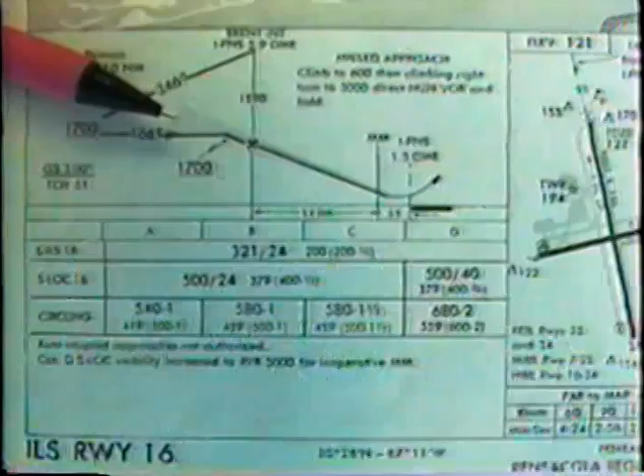There are 2 broad categories of instrument approaches: precision and non-precision. The difference, while very important, is only in the conduct of the final approach to the airport, where a precision approach provides electronic descent guidance and a non-precision approach does not.

Up to the final approach fix, the following discussions of segments, fixes, altitudes, and procedure turns apply equally to precision and non-precision approaches.

Cleared for approach. This clearance authorizes you to fly the procedure on the approach plate and to descend to the published altitudes. You may not descend during an approach until you have received approach clearance and are on a published route. The published route may be any approach segment, transition, or airway. If an airway, you may descend to the MEA, but be sure it is higher than the transition or initial approach altitude. Otherwise, you will find yourself climbing later on.

When flying direct to an approach fix, you may not descend even if cleared for approach until you are on a published route.

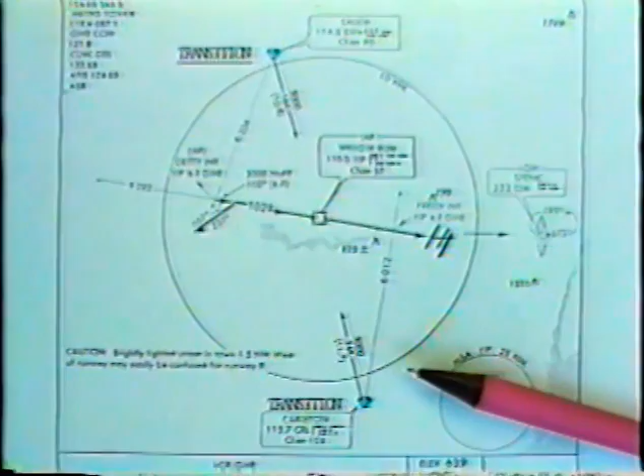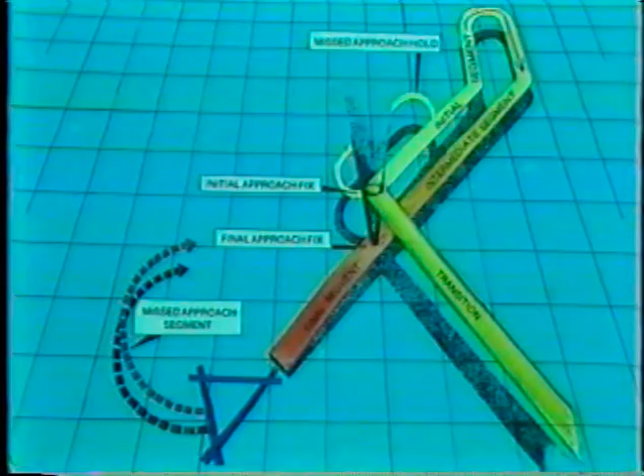This diagram shows the segments of a typical approach. The names and arrangements of the segments do not depend on the type of approach we assume it to be. An approach may have as many as 4 segments and 1 or more published transitions from the en route environment. Each segment and transition has a clearly defined course, a beginning and an end, and a published minimum altitude. The pilot has certain tasks to accomplish during each segment of the approach, and understanding the various segments of a particular approach is important in planning how the approach is to be flown.

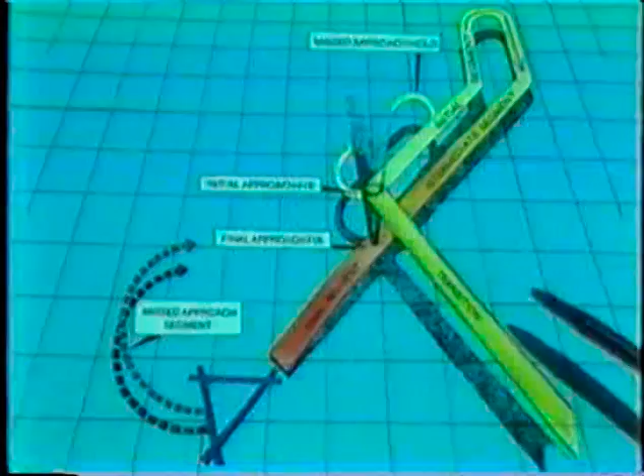Transition, the general term that describes the change from one phase of flight or flight condition to another. In other words, transition from en route flight to the approach, or transition from instrument flight to visual flight.

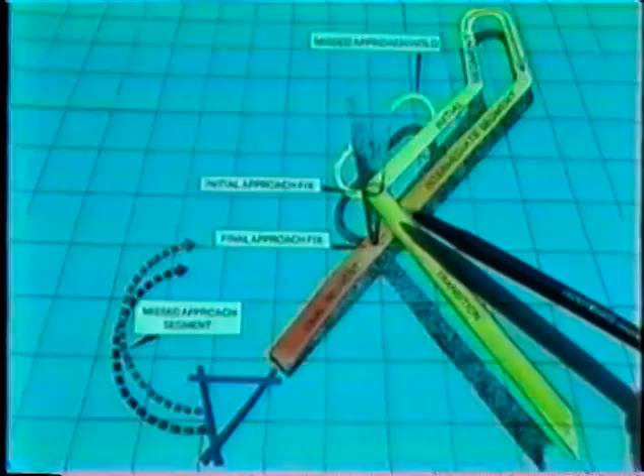Initial approach, the segment between the initial approach fix and the intermediate fix, or the point where the aircraft is established on the intermediate course or final course.

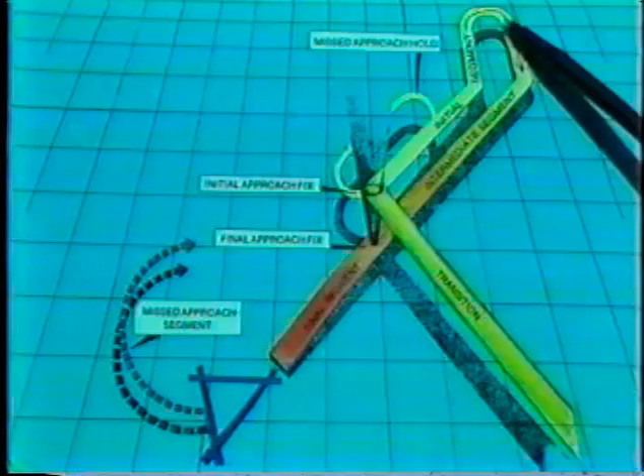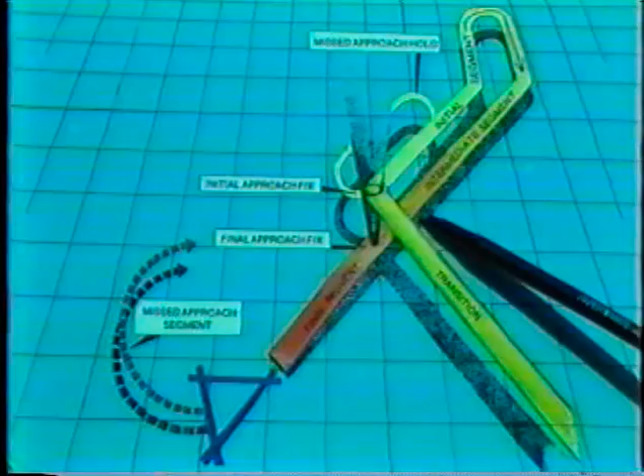Intermediate approach, the segment between the intermediate fix or point and the final approach fix. Final approach, the segment between the final approach fix or point, glide slope intercept for precision approaches, and the runway, airport, or missed approach point.

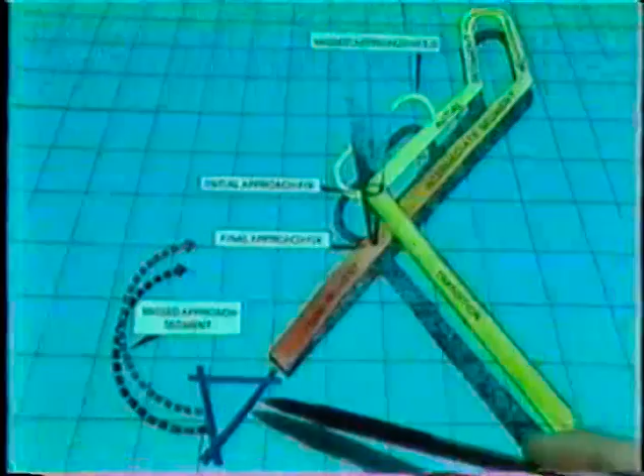Missed approach, the segment between the missed approach point or point of arrival at decision height and the missed approach fix at the prescribed altitude.

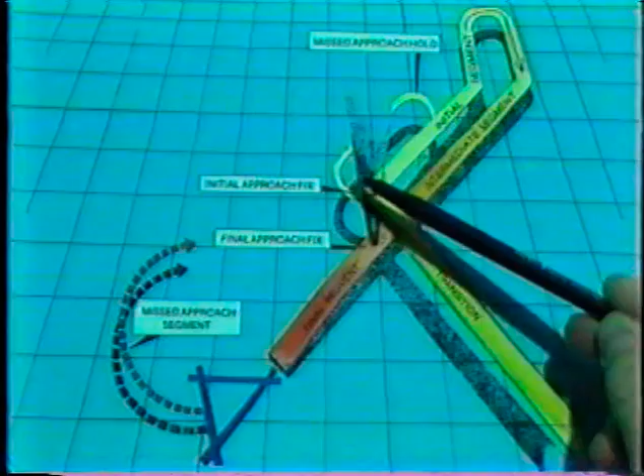This plan view shows a transition from one en route fix to the Pickens NDB. Transitions are also called feeder routes. Assuming the pilot has received approach clearance, the pilot may descend to the altitude published on the plan view for the transition he is on.

The initial approach fix, marked IAF on the plan view, is the Pickens NDB and is the point where the approach begins. The initial segment begins at the IAF and is the procedure turn outbound segment of the approach. It includes the entire procedure turn and ends when the aircraft is established inbound to the fix. During this segment, the pilot should slow the airplane to approach speed and descend to the published altitude of 1,500 feet.

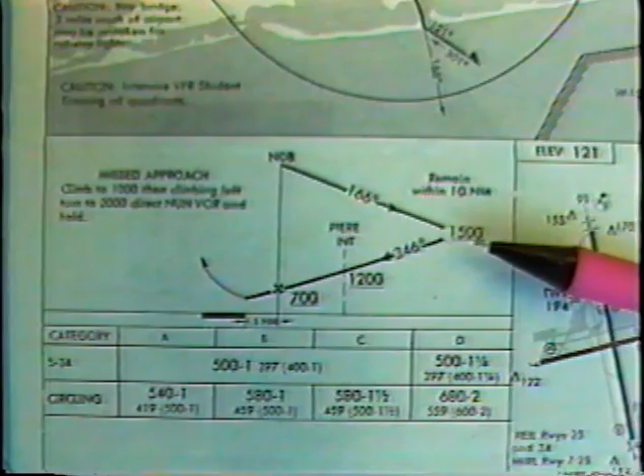This particular approach has an intermediate fix, Pierre intersection. The intermediate segment begins at Pierre intersection when the aircraft has turned inbound on the 346-degree bearing and ends at the NDB.

Minimum sector altitudes, MSA, are not to be used during an approach. They are for emergencies only. Here, we see a 25 nautical mile circle at the top right corner of the approach plate. The notation MSA, PKZ, NDB indicates the center of the circle.

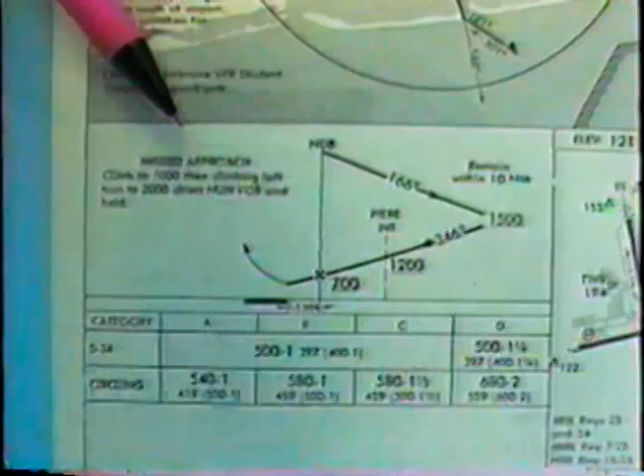It is during the procedure turn inbound segment of the approach that it's a busy time for the pilot. Here, the final landing checklist should be completed and the missed approach instructions memorized. Since the altitude specified for this segment is lower than that for the initial segment, the pilot should descend to 1,200 feet.

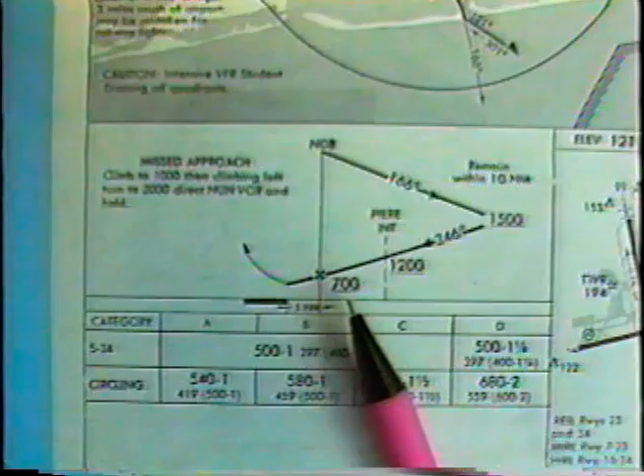The final approach fix, FAF, is the Pickens NDB and is identified by the Maltese cross on the profile view. It marks the beginning of the final letdown to the airport. When not in radar contact, the final approach fix inbound must be reported to ATC. On this approach, the final approach fix is the NDB, and the intermediate fix is located at Pierre intersection.

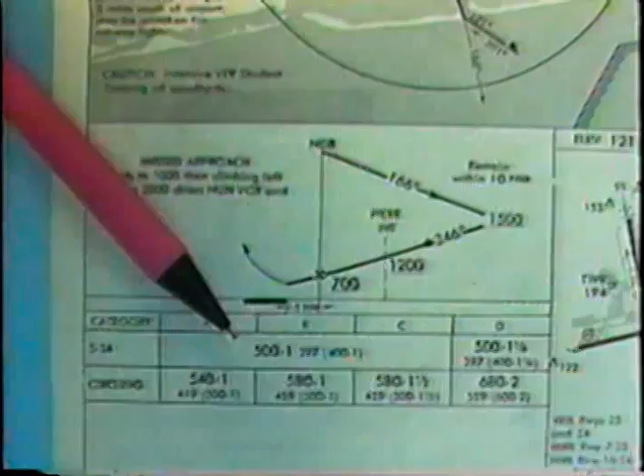The final approach segment is the course from the final approach fix to the missed approach point. During this segment, the final descent to minimums is made. Since this is a non-precision approach, in other words, there is no descent guidance, the pilot simply descends to the minimum descent altitude, MDA, of 500 feet, and levels off, carefully tracking the 346-degree bearing from the NDB until the missed approach point, MAP, is reached.

On this approach, the missed approach point is 1.5 miles from the NDB, and it is usually identified by timing the final approach segment.

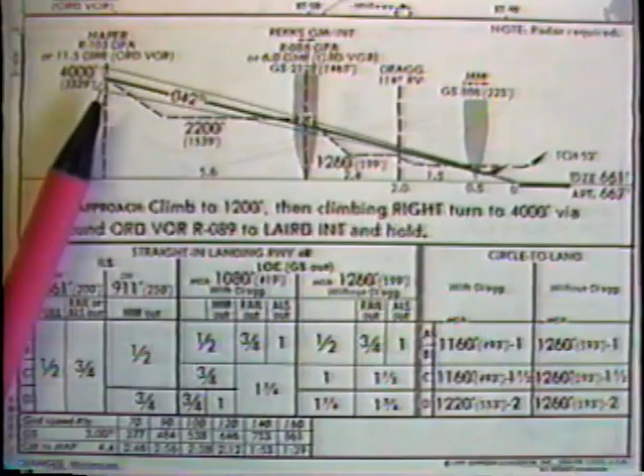In some cases, the final approach segment is divided into parts with different altitudes separated by step-down fixes. A step-down fix may be defined by a crossing radial, a DME fix, or a fan marker.

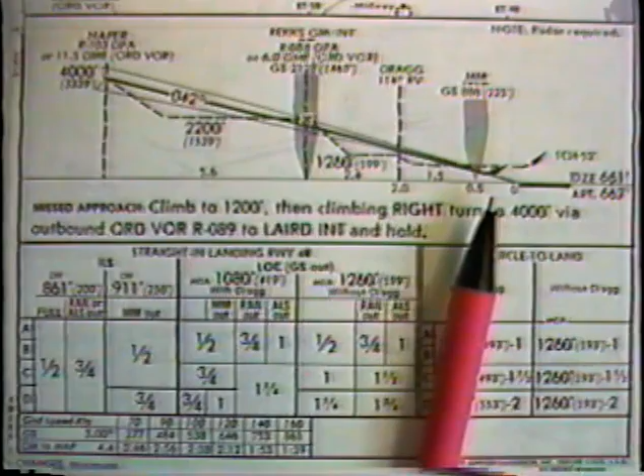Assuming the runway is not seen, the missed approach segment begins at the missed approach point. It is crucial to immediately initiate a safe climb away from the terrain. The pilot should not have to refer to the approach plate for missed approach instructions now, but should have memorized

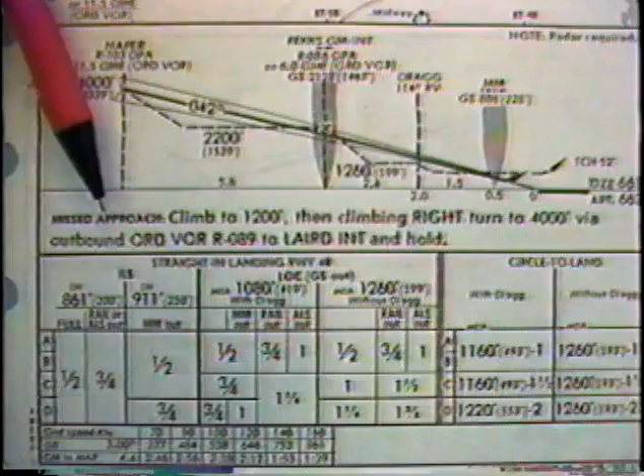them before beginning the final approach. While a missed approach requires an ATC report, the first priority is to climb away from the ground and begin the missed approach procedure. The radio call can safely wait a moment or two.

The missed approach segment for ILS runway 4 right at Chicago O'Hare consists of climbing straight ahead to 1,200 feet, then making a climbing right turn to 4,000 feet via outbound VOR radial 089 degrees to Laird intersection and hold.

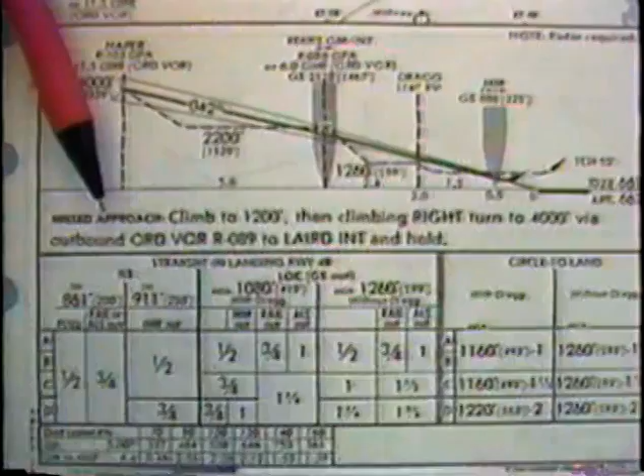The hold at Laird intersection is the published hold. This is shown in the plan view and missed approach section of the approach plate.

If the runway is seen, a landing can be made. A straight-in landing is a landing on the runway referred to in the approach name. Landing on other than runway 4 right constitutes a circle to land maneuver and requires the use of circling minimums, even if no actual circling is done to line up with the desired runway.

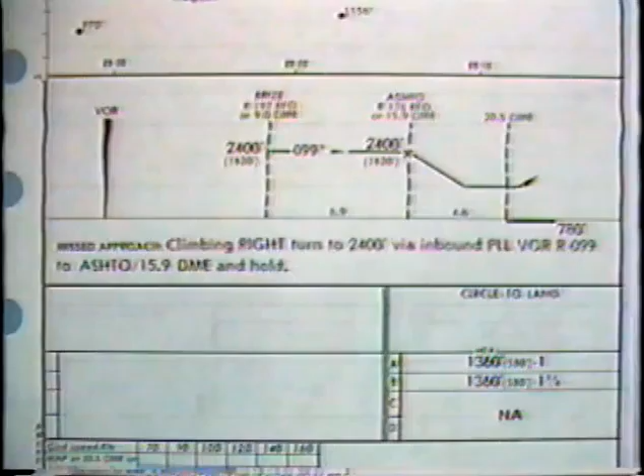If an approach name does not specify any runway, as in the Rochelle, Illinois VOR-A approach, no straight-in minimums are shown.

At a field with no control zone, circling presents an additional problem. Below 700 feet AGL, you are in uncontrolled airspace where VFR minimums are 1 mile and clear of clouds. There just might be somebody in the pattern practicing touch and goes, and you are both legal. Broadcasting your position and intentions on Unicom is your only defense against this danger.

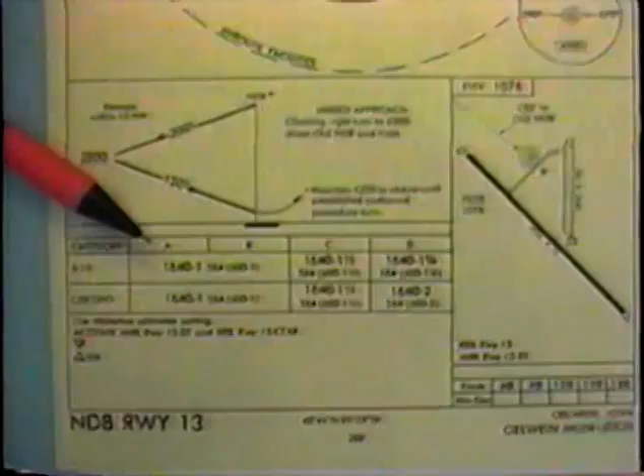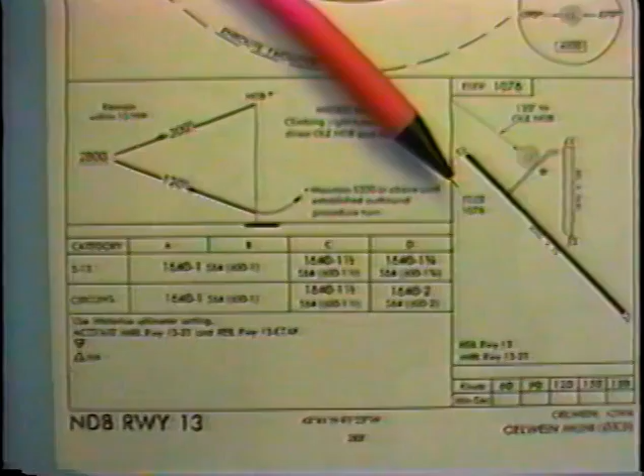The large numbers in the minimums box give minimum descent altitudes, MDA, above sea level, MSL. In the straight-in landing section, the parenthetical number is the height above touchdown, or HAT. Adding this number to the touchdown zone elevation, TDZE, shown in the profile, gives the MDA. 564 plus 1076 equals 1640.

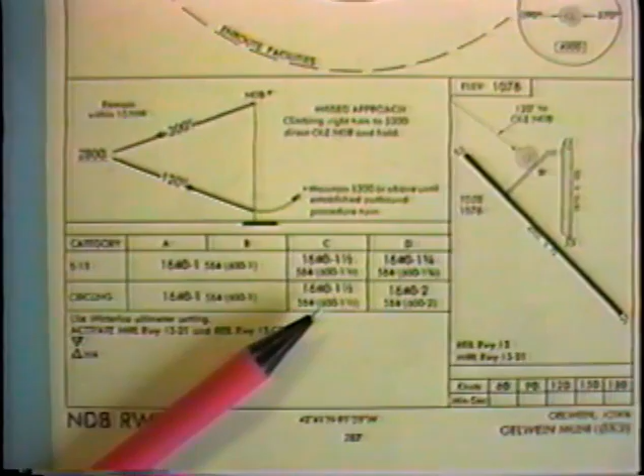The touchdown zone elevation is the highest point in the first 3,000 feet of the runway. The parenthetical numbers in the circle to land section are height above airport, HAA. This, plus the airport elevation, the highest point on any runway, also equals the MDA. 564 plus 1076 equals 1640. The highest obstruction on a Jeppesen plate is shown by the curving black arrow.

An approach may not have a full complement of fixes, segments, and transitions. This approach shows an approach with no intermediate or final fix and no intermediate segment. On this approach, descent to the MDA is initiated at the completion of the procedure turn.

The procedure turn. A procedure turn is a maneuver used to reverse direction and establish the airplane inbound on the intermediate approach segment or final approach course.

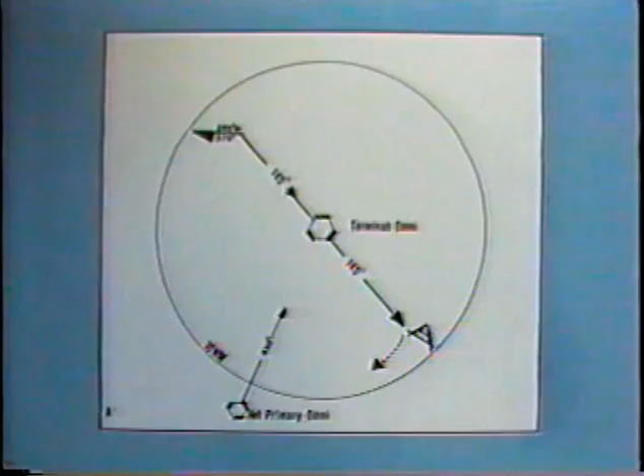If a conventional turn is shown on the approach plate, as in the illustration, the turn must be accomplished within the specified distance, usually 10 nautical miles, at or above the specified minimum altitude and on the specified side of the course. Distance and altitude information are obtained from the profile view of the approach plate.

The outbound distance flown before the turn is started is left to the pilot's discretion, as long as the turn is completed within the required distance from the fix. Usually 2 minutes outbound allows sufficient time to become established inbound and descend as necessary before reaching the final approach fix. In extremely windy or turbulent conditions, the pilot may choose to lengthen this time.

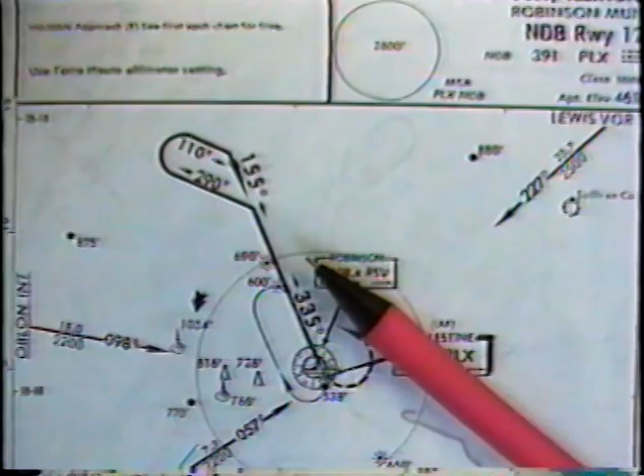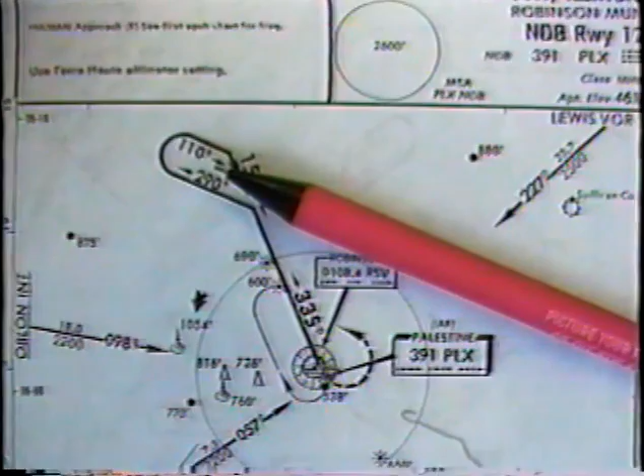The headings flown in a procedure turn are not mandatory and may be altered by the pilot to compensate for wind conditions or personal preference. Some alternate procedure turn patterns are shown here. Notice that there is no choice as to which side of the course the turn is made on.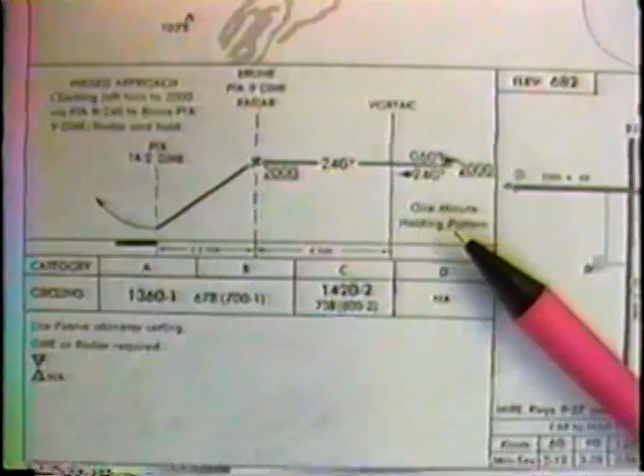The length of the holding pattern leg is usually 1 minute and is shown on the profile view. If you need more time to get established inbound at the proper altitude, advise ATC that you wish to make another circuit in the hold. Do not extend the length of the holding pattern legs.

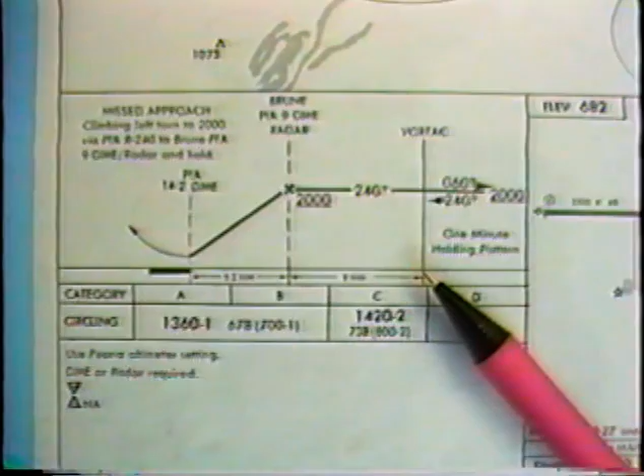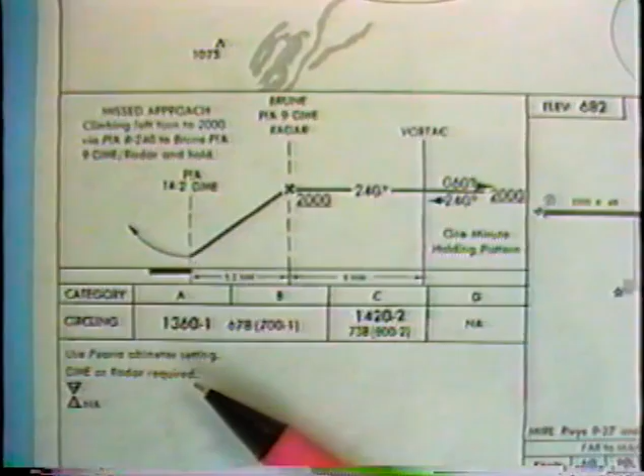Notice that the hold at the Peoria VOR is at the initial approach fix and constitutes the initial approach segment. At the completion of the hold, you are back at the VOR, which is now the intermediate approach fix, although it is never marked as such. The intermediate segment then takes you to the final approach fix, Brune intersection, defined by 9 DME miles or a radar fix on the 240-degree radial of the Peoria VOR. Notice that DME or radar is required for the Canton-Ingersoll VOR-A approach.

In addition to NDB, VOR, and VOR DME approaches, there are several less common types of non-precision approach.

A localizer approach provides very accurate course guidance to the threshold of a runway. With a localizer frequency in the navigation receiver, the CDI is approximately 4 times as sensitive as when tracking a VOR course. The width of a localizer course is 3 to 6 degrees, approximately 700 feet at the runway threshold. The CDI responds to the localizer course regardless of the OBS setting. The OBS has no function except possibly to remind the pilot of the course.

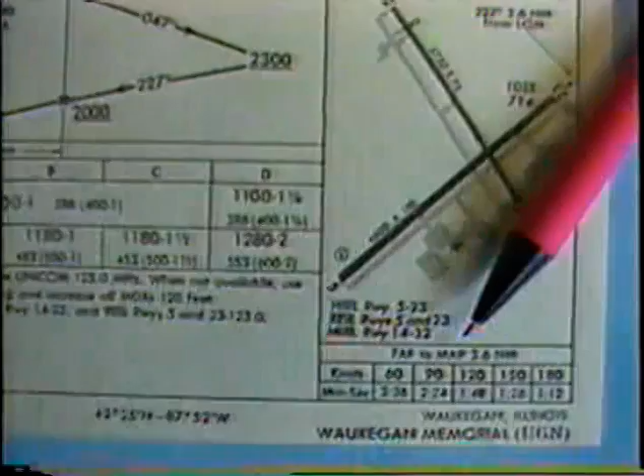Since a localizer is a component of the ILS, every ILS approach plate has LOC, or glide slope out—that's GS out—minimums published in the minimums box. In the event that a glide slope receiver fails or the glide slope is out of service, the pilot can make a localizer approach by referring to the time and ground speed box and timing from the final approach fix.

A localizer type directional aid, or LDA, is a localizer that is not aligned with a runway. It provides the same accuracy but does not bring the aircraft down the extended center line of the runway as does a localizer. There may be straight-in minimums authorized if the LDA is aligned within 30 degrees of the runway.

Airport Surveillance Radar, ASR, approaches are available at some terminals. The controller uses a special large-scale radar screen to accurately vector the airplane to the threshold of the runway. The pilot is continuously informed of his distance from the runway and his position with relation to the course center line. He will be informed when to descend to the MDA.

If on final of an ASR approach the pilot receives no communications for 15 seconds, the rules require a missed approach. At fields where there are published ASR approaches, Jeppesen publishes separate plates for ASR approaches. Controllers are required to maintain ASR accuracy, so they are often willing to provide practice for you, the pilot, when their workload is not too heavy.

A precision approach provides descent as well as course guidance. It requires that the pilot develop the skill to control his glide path according to needle indications in the cockpit or verbal instructions from a controller on the ground.

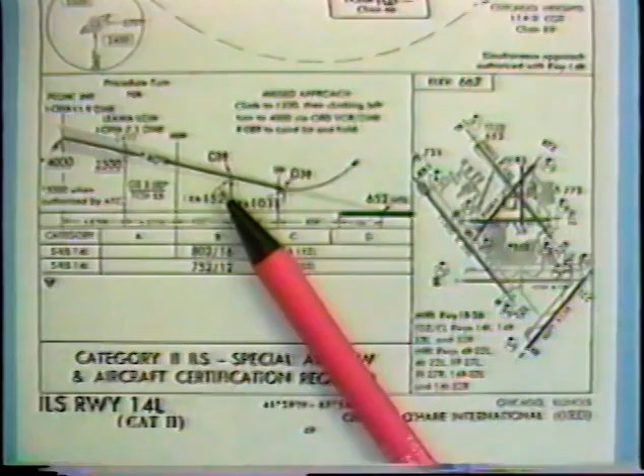The missed approach point on a precision approach occurs when the airplane on the glide slope reaches the decision height. At this altitude, the pilot must either make visual contact with the runway or runway environment or execute a missed approach. There is no leveling off at decision height—either continue visually to a landing or immediately start the missed approach.

The outer marker is roughly 5 miles from the runway, approximately where an aircraft at the intermediate approach altitude will intercept the glide slope. The middle marker is approximately 1/2 mile from the threshold, about where an airplane on the glide slope reaches decision height.

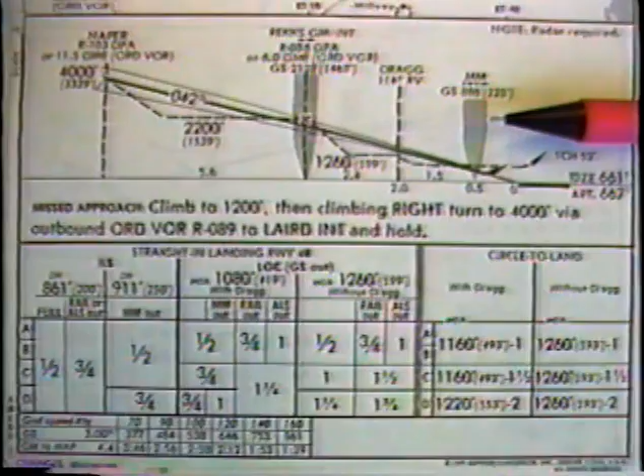There may be a low-power NDB known as a compass locator at the outer or middle marker. These are then called locator outer markers, LOMs, or locator middle markers, LMMs.

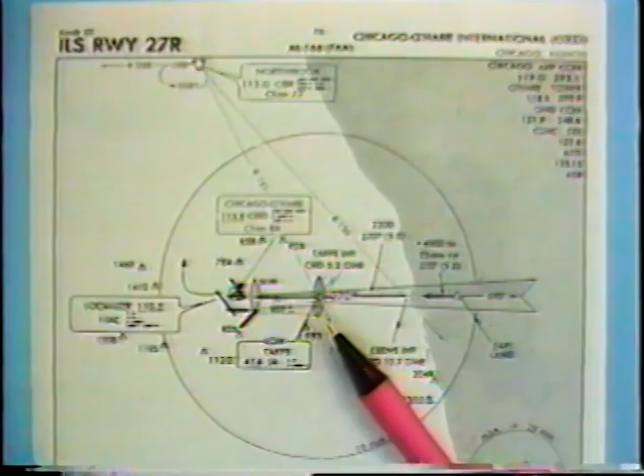In addition to the 4 elements—outer marker, middle marker, localizer, and glide slope—an approach lighting system, or ALS, is usually associated with an ILS. These systems offer a large array of brilliant lighting as far as 1/2 mile from the runway. They can be seen by the pilot in all but the worst of weather.

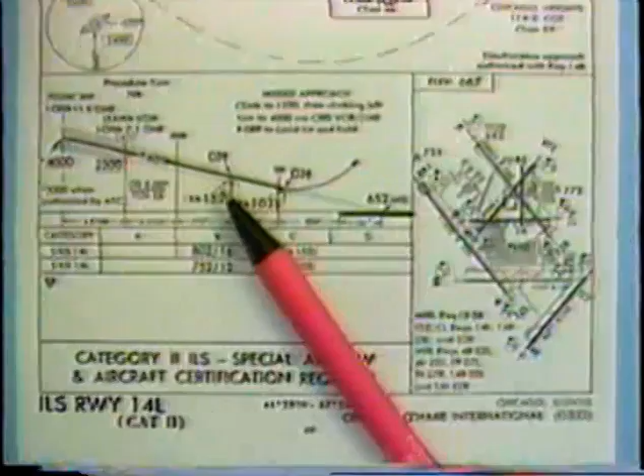The decision height on a typical ILS is 200 feet above the touchdown zone. A Category 2 ILS offers a decision height of 150 or 100 feet above the touchdown zone, but is usable only by specially certified aircraft and crew.

Before you reach the initial fix of an ILS, there may be as many as 5 radios to set up. The ILS frequency itself must be tuned in to the number 1 nav radio and identified. If there is an outer compass locator, it should be tuned and identified on the ADF. The marker beacons should be tested and the audio switch and volume control checked in the right position.

If you are working approach control, the tower frequency should be entered in your other comm radio to avoid having to switch frequencies at a crucial moment of the approach. Lastly, the second nav radio may need to be tuned to the missed approach fix or to a step-down fix.

On the ILS, there is some heading which will exactly compensate for wind and keep the airplane on course. It is called the reference heading, and your first job is to determine, by bracketing, exactly what this heading is. It may equal the course shown on the approach plate, or, owing to wind or DG precession, it may be something different.

As the aircraft starts to intercept the localizer, the CDI will move from full-scale deflection towards the center. As soon as the needle moves, begin turning the airplane toward the final course, assuming approach clearance has been received. When the CDI stops moving, stop turning. The DG now shows the first approximation to the reference heading. If the needle moves slightly, turn 5 degrees toward the movement. Continue bracketing with smaller turns until it stops completely.